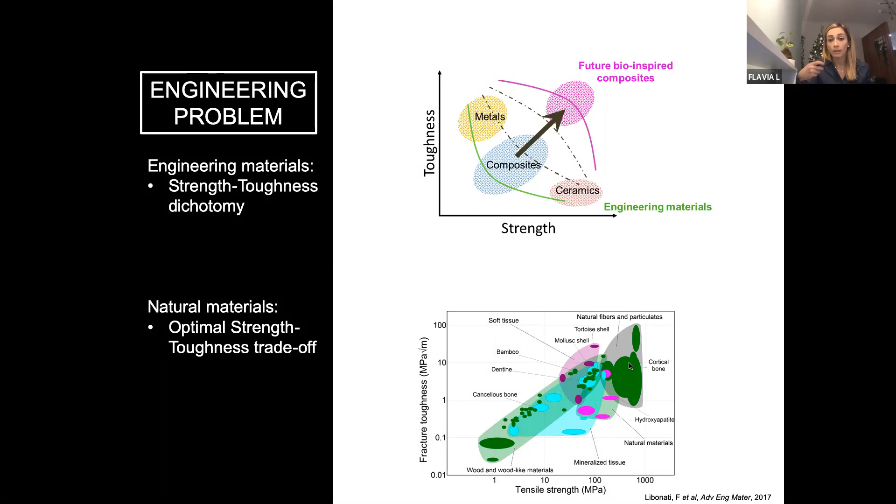And if we look for biomimetic models, probably the best ones are nacre and bone. In my research, since my postdoc and afterwards when I became assistant professor, now at the University of Genoa as associate professor, together with my colleagues, what we are trying to do is design materials inspired by nature, and in particular inspired by bone.

Bone has been my main source of inspiration because it is a lightweight, strong, and tough material. I don't know how familiar you are with bone, but it is an amazing structure—a multi-scale structure with up to 7 levels of hierarchy.

Here's a simplified version. We are used to the typical dog bone shape at macro to mesoscale, where we can recognize the stiff tissue and the soft tissue—the stiff or compact tissue, also known as cortical bone, and the soft one, also known as trabecular bone, which is a porous tissue.

But if we take a microscope and look at this structure more in detail, especially in the compact tissue, we can find an organized structure called osteon structure. This structure is made by a particular feature called osteon—a circular repeating feature embedded into a matrix.

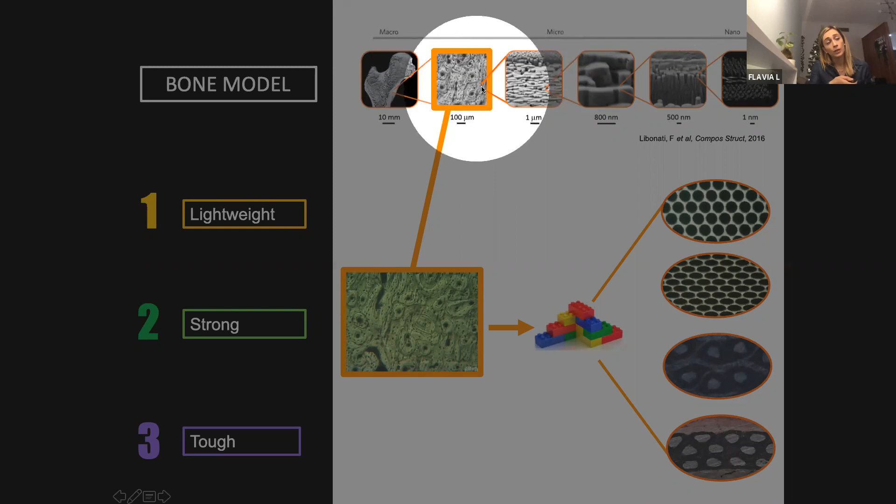And if we go down one level, within each osteon and in between the osteons, we can find different lamellae—circumferential or interstitial lamellae, which are different layers, similar to a fiber-reinforced composite where you find different fibers.

Again, these fibers have different orientation, but also a hierarchical organization, where in the end we can distinguish the main building blocks, which are collagen and hydroxyapatite. Hydroxyapatite is a mineral crystal, usually brittle, although here it's not properly brittle thanks to additional mechanisms occurring at the nanoscale, while collagen protein confers the ability to dissipate energy under mechanical deformation.

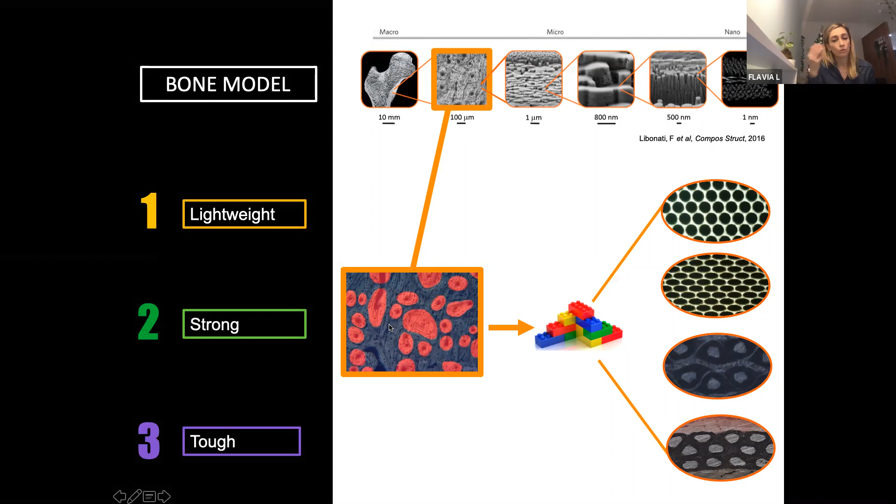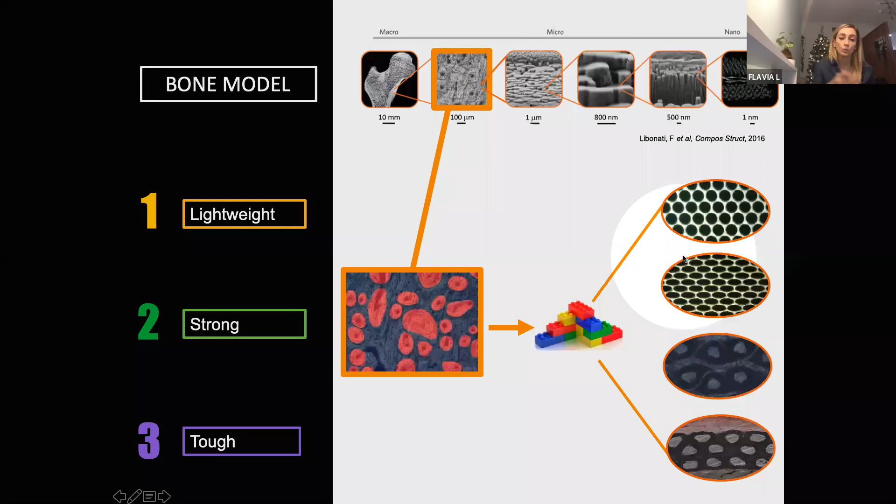In most of the research, we focus on the microscale structure, and we simplify it by considering two main building blocks—different circular or elliptical features embedded into a matrix. Today I'm going to focus on the simplified version that we try to mimic and implement by 3D printing, and then by computational modeling as well.

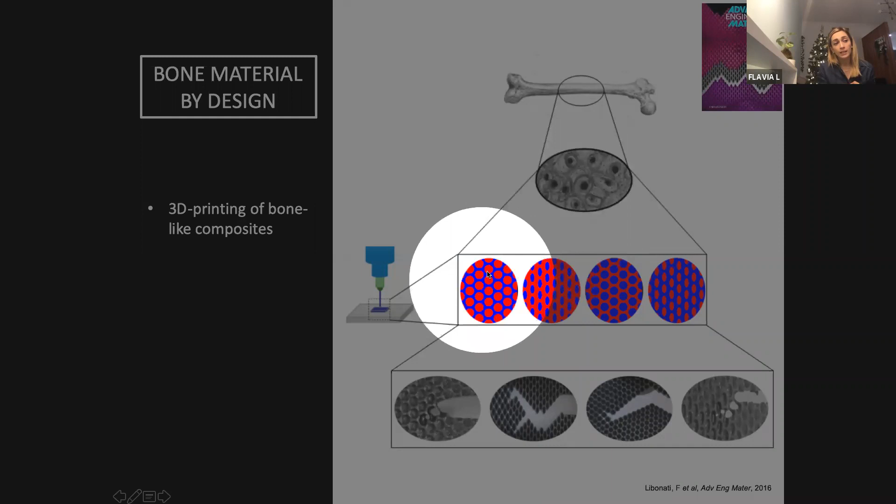So basically, in these previous studies, together with colleagues at MIT and at Politecnico, we used 3D printing as proof of concept to prove the validity of this bone-inspired design in order to achieve damage tolerance. So we considered this structure of cortical bone, and we simplified it into this two material structure, let's say.

We consider the pure material of the 3D printer as building blocks. We keep the osteon volume fraction constant, and we combine them together to achieve different structures, simplifying the osteon as perfectly circular or elliptical. This simple representation neglects many aspects such as hierarchy or interface, but with it we were actually able to mimic the main toughening mechanism observed in real bone, achieving an amplification in toughness of about one order of magnitude.

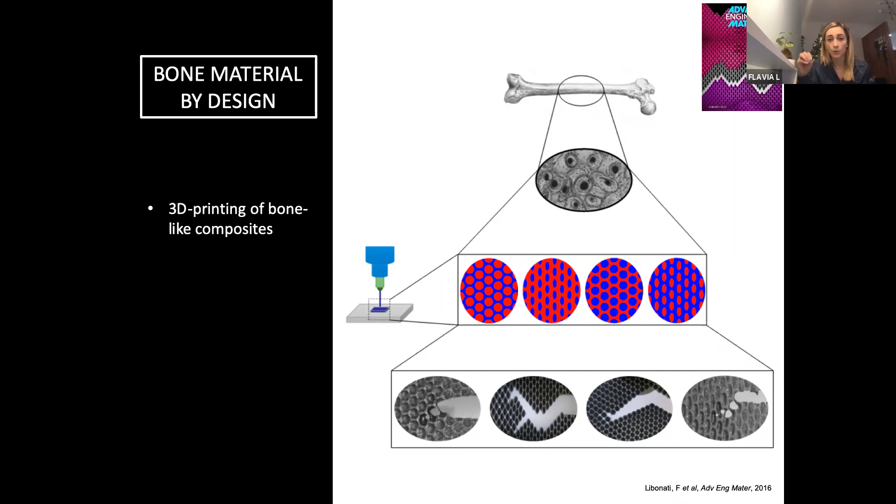But then we realized that with the 3D printer, we can leverage its versatility to design and test all the geometries we want. But we also wanted a numerical framework, usually used in the design phase, to apply a biomimetic but also materials-by-design approach in order to reach our target properties.

So we decided to work on two different fields, both finite element models and lattice spring models. Today I'm going to focus more on the lattice spring model, as it's the main topic of this workshop. But just to give you an idea, both techniques are good, but each one has pros and cons.

Finite element models generally require pre-processed mesh generation and mesh refinement in the area of interest, whereas lattice spring models give the advantage that they do not require mesh regeneration or mesh refinement.

They also provide insights into the material behavior, which was our main goal at the beginning, because we wanted to better see the toughening mechanisms that occur in these materials, since most of the time the behavior of these materials is really structure-driven, so topology-driven.

Of course, we know that this kind of simulation is more time demanding with respect to finite element, but we still try to use both approaches depending on what we are looking at.

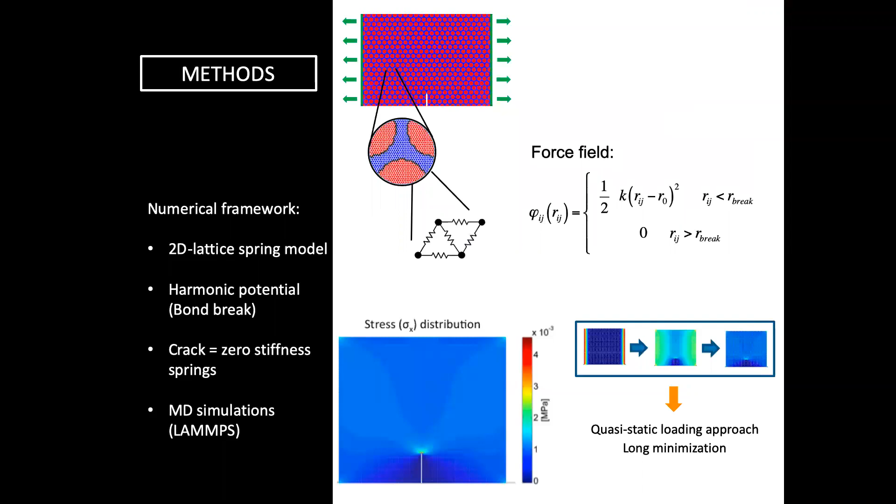So as a first attempt, in our first framework, we use a 2D lattice spring model where we consider a harmonic bond potential to simulate the force field. So the method is...

A question. I think you mentioned disadvantages of the finite element method, but what are the advantages?

Probably I skipped it. Usually they are cost effective, they are reliable because they also provide exact information. So if you want to have an idea of the exact properties, probably finite elements are more accurate in this sense.

But then, they do not provide information about the toughening mechanism. So that's why we try to work on both, considering the computational time of both techniques and also the pros and cons of each one.

What I didn't mention is that besides finite element, we also use the extended finite element method, which allows us to see at least the crack propagation mechanism.

And it's not that it doesn't need mesh refinement. It claims to be a mesh-independent mechanism, although it's not properly mesh independent. So you need to be careful when you use this approach.

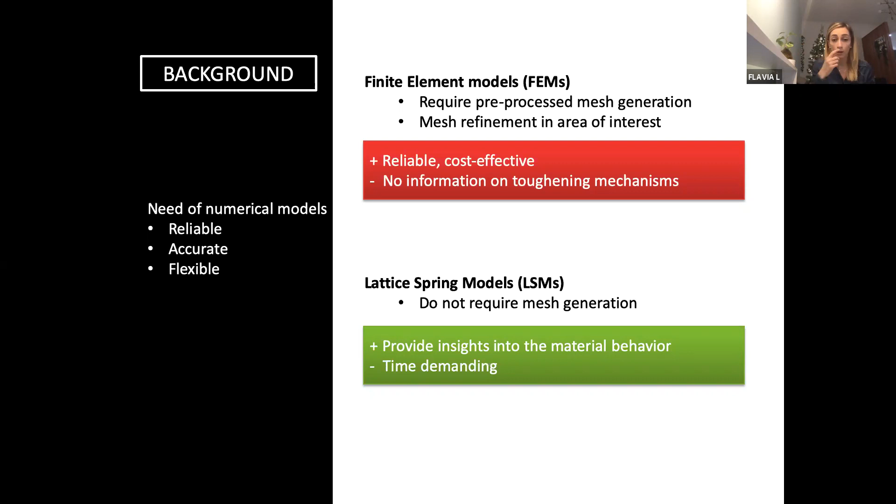But I think each one has its own pros and cons. If we want a comprehensive view of materials design, probably you should use both. Thank you. You're welcome.

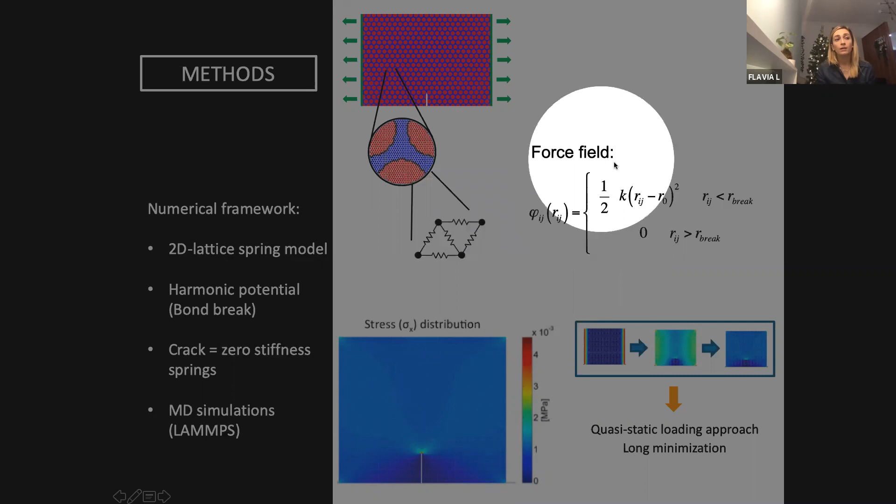Coming back to this lattice spring model, we implemented a 2D lattice spring model where we modeled the crack as a zero stiffness spring, and then we modeled the interaction of the beads through springs with a force field described by a harmonic potential.

Basically, it's a simplified representation where we have only the elastic part, so we don't have plasticity in this model, but it's something that could be implemented afterwards.

All the simulations are run using LAMMPS, a molecular dynamics simulation code, and we use a quasi-static loading approach, which means we consider the two edges and systematically apply strain at the ends, followed by long minimization, which allows us to have a good homogeneous redistribution of stresses without affecting the edges, without stress concentration at the clamps, at the lateral edges.

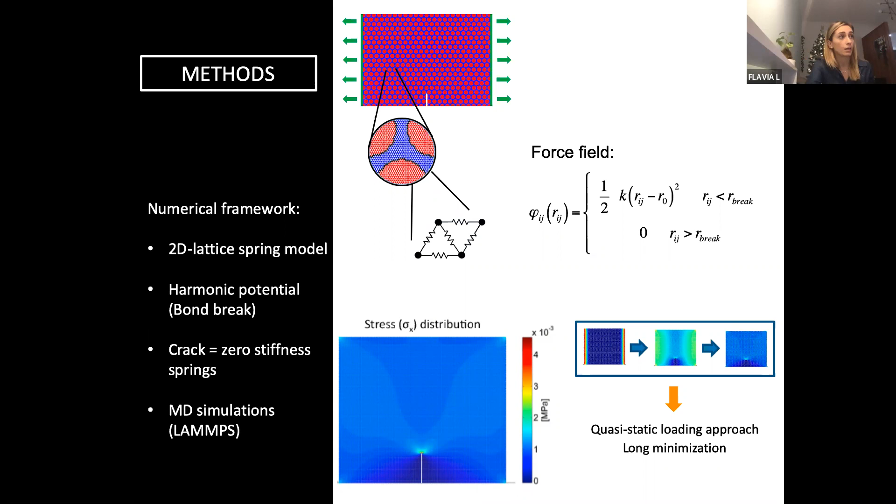First we did a calibration based on the experimental properties, and in particular on the building blocks. So we have stiff base materials and soft base materials.

But what's important is that we also have an interface, which plays a crucial role here. We noticed that by modeling the interface, the behavior changes completely. So in the calibration model, we tried different combinations of reinforcement and matrix to find the best interface values, which could approximate the experimental curve.

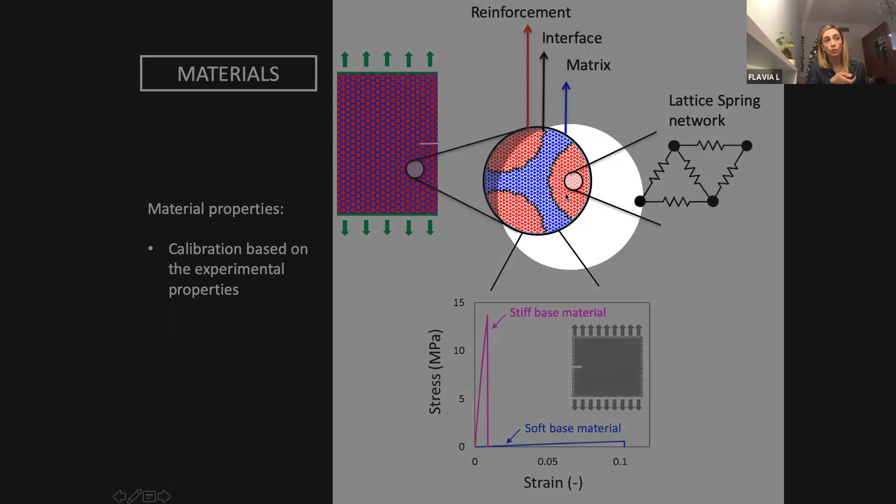Why did we have to do this calibration in a systematic way? Well, because once you print this material - and this is very important for the printing technology - you actually have two materials at the beginning. We use polyjet technology with a Stratasys printer, and basically you have a nozzle with different nozzles.

When you have the jet of these materials in more or less a liquid form, the material is then UV cured immediately. So what happens is that during the curing, these materials have a really low viscosity, which means you can have a mixture of them.

So a third material is formed at the interface. And this is proved also by the fact that in the end, we never get a failure at the interface. The materials in the end are perfectly bonded due to the formation of a chemical reaction, a chemical bond, and the formation of another material.

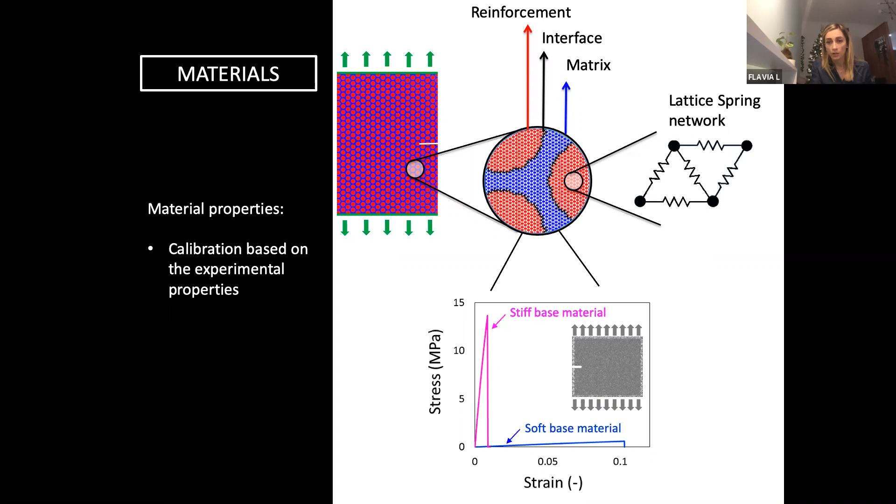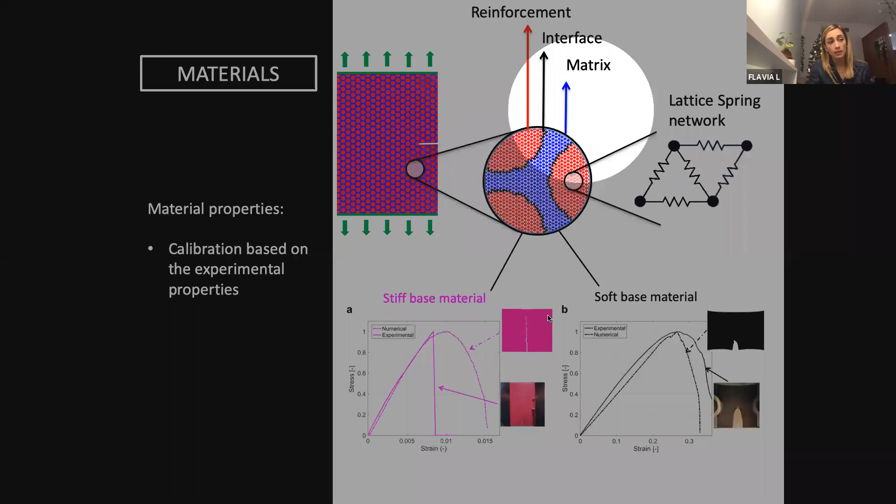So we first did a calibration on these basic materials, and we can also see a comparison between the experimental and numerical curve. Then we implemented all the designs that we previously 3D printed.

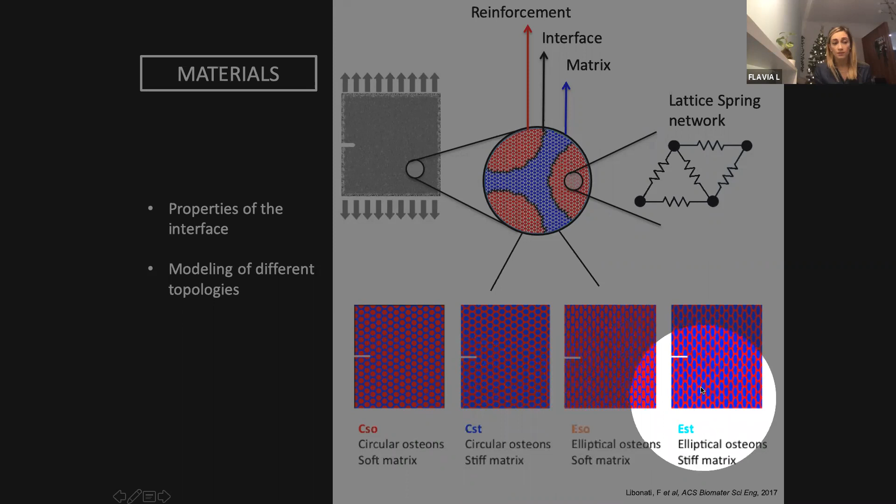We basically have a circular osteon into soft matrix, then the reverse case, into stiff matrix, and then the elliptical one into soft and stiff matrix. Of course, the elliptical one is very anisotropic, so it was studied in both directions. So basically, all the materials that we also 3D printed.

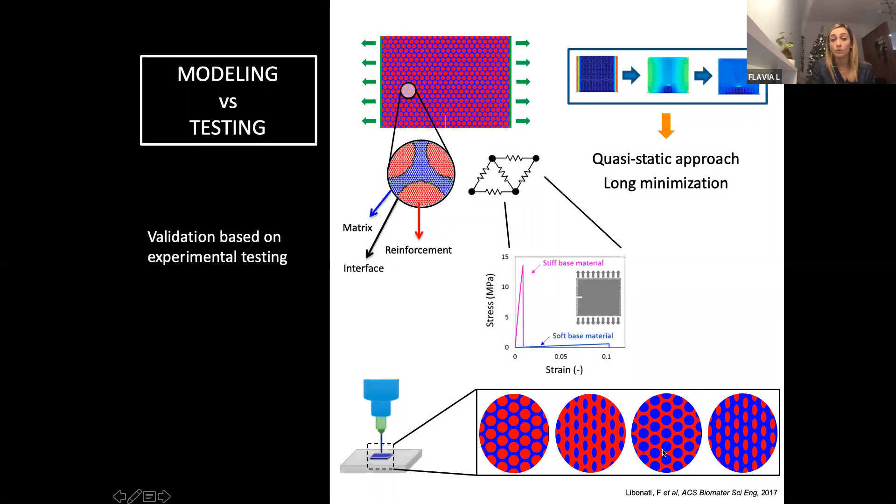So we could, in the end, do a validation of these models. What's interesting is that with this kind of approach, as I said before, with finite element, you can't really predict the exact properties, but this was not our goal in this case.

Our goal was to understand the role of the toughening mechanism on the overall behavior and try to predict which was the best topology. And in this case, we can have a great comparison in terms of experiment and simulation.

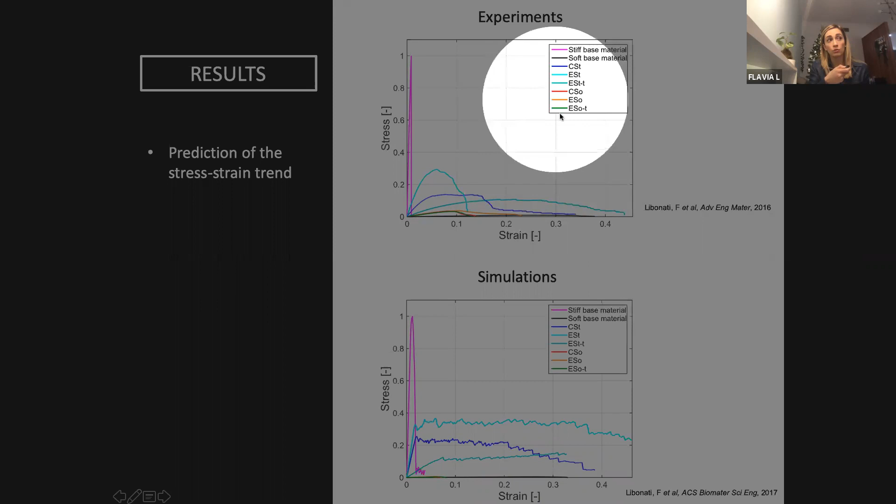You can see how we can get the stress strain curve for homogeneous material, but also for all the topologies. And if we do a one-to-one comparison, we can see how we can mimic the stress strain curve. But what's really interesting is that we can

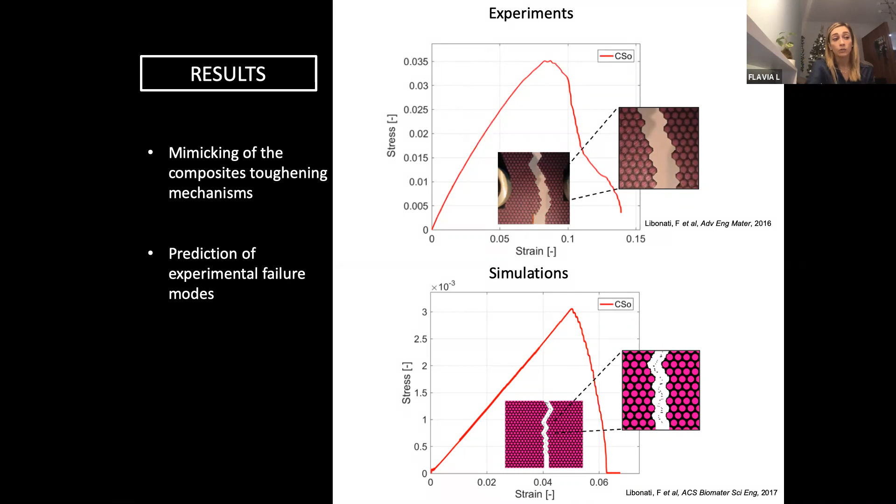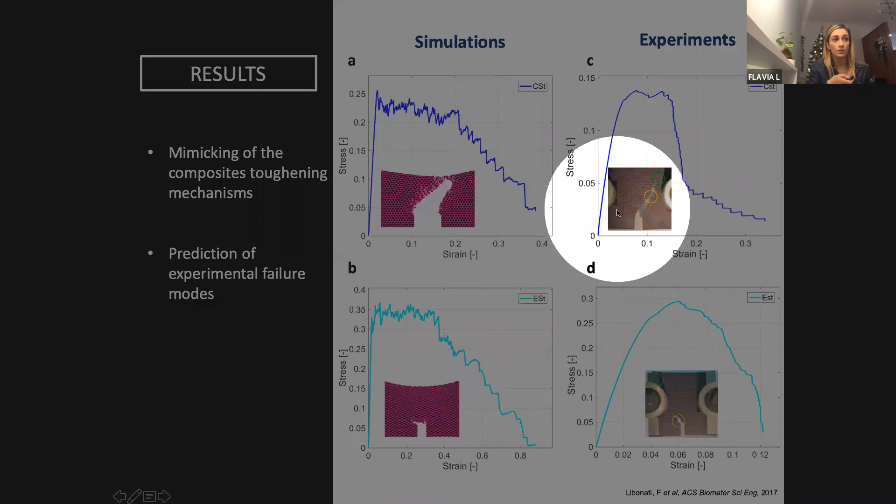really get an insight into the material behavior and see how the crack propagates into each topology. So this was in a circular osteon with soft matrix, but the same you can see if you look at the case of the stiff matrix.

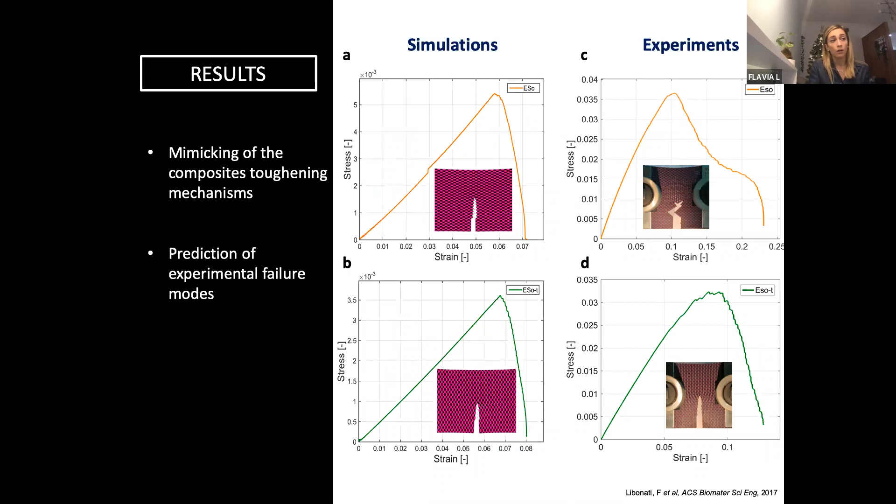And you see all this mechanism, or the case of the elliptical osteon, or again the effect of the anisotropy. You can see here the same material tested in two different directions and how the crack propagates in different ways.

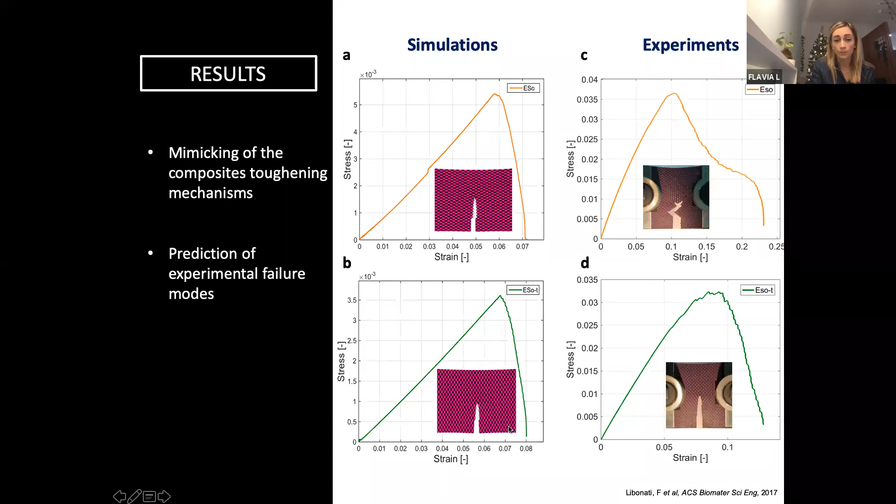Summarizing here, what you can see is that with this kind of method, we can actually mimic all the bone and bioinspired composite toughening mechanisms. So what we can see here is a comparison between the toughening mechanism that we observe in real bone, the schematization and picture of real bone, but also a picture taken on our experimental 3D printed specimen, and then the virtual in silico testing. You can see that in the end, we were able to mimic all these toughening mechanisms.

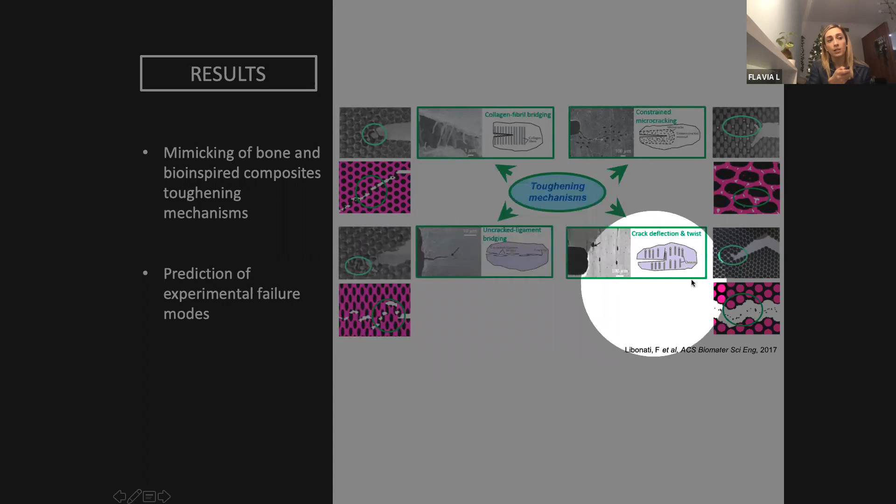The collagen fibril bridging is mimicked through a soft polymer fiber bridging. The constrained microcracking is the formation of tiny cracks in front of the crack tip. Then the uncracked ligament bridging, again the formation of tiny cracks in front of the crack tip. And then the crack deflection and twisting, which is probably the mechanism that mostly contributes to the dissipation of energy and to the toughness enhancement.

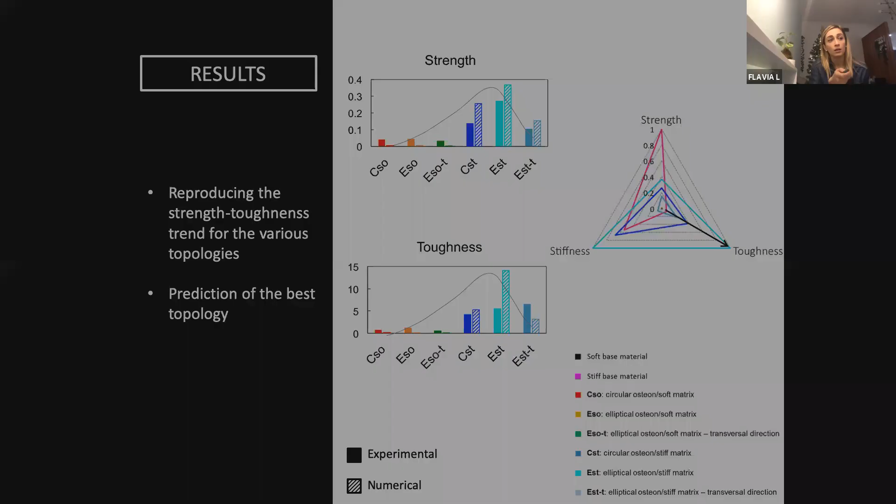So in the end, with this kind of mechanism, what we can do is reproduce at least the strength-toughness trend, which was our goal, and also we are able to predict the topology which provides the best trade-off in terms of strength, toughness, stiffness, all the properties we are interested in.

And also to better understand the effect of the different components. Usually here we provide a simplified schematization, so we decided to have contrasting properties, because we were limited by the materials of the 3D printer. But once you validate the model, you can play with different stiffness ratios and different optimization techniques, and expand the design field as much as you want.

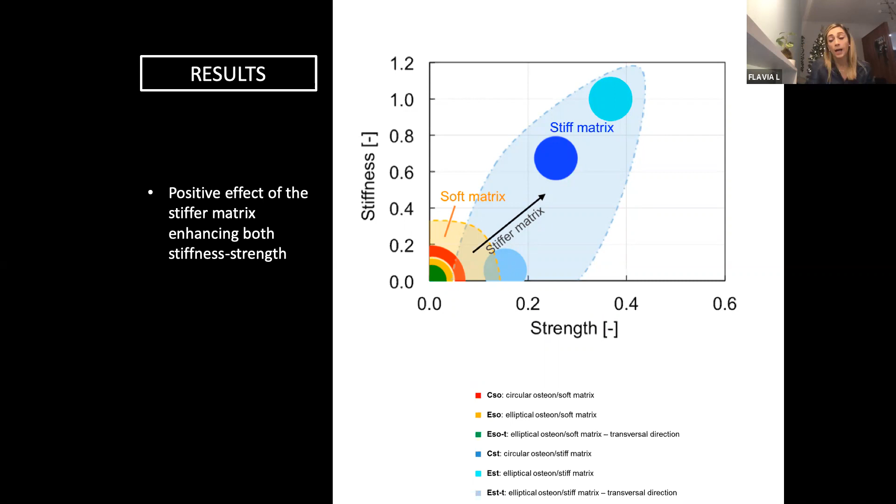Here, what we notice is the positive effect of a stiffer matrix, which really boosts the stiffness-strength combination with respect to a softer matrix. The reason can be provided by looking at the stress distribution. This is again another powerful thing about using simulation.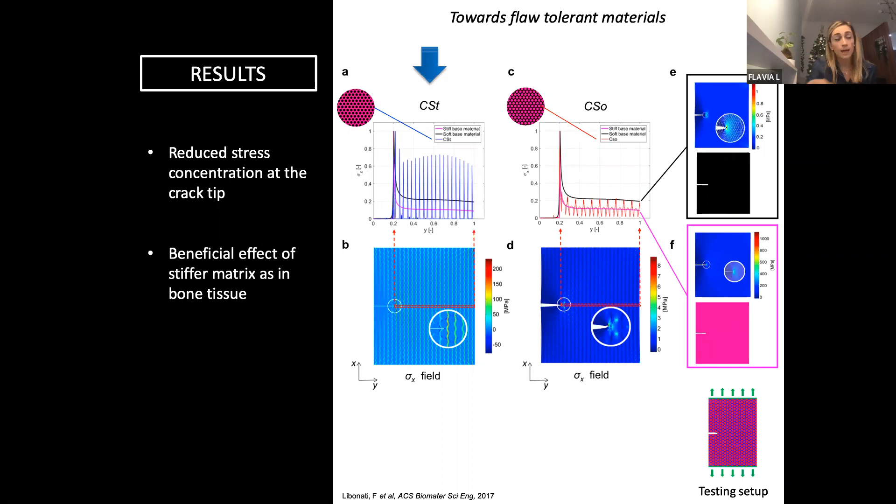But the difference is that with stiff and soft matrices, in both cases you have this heterogeneous stress field, but once you have a stiffer matrix, you have a reduced stress concentration. This means we can move toward flaw-tolerant material in this case, and this is better achieved if we focus on a random distribution of circular and elliptical voids instead.

So after validating this numerical tool, what we did was try to expand the design field and change the topology. This was just an initial attempt which could be further expanded by optimization studies. We combined both circular and elliptical voids and considered random distributions with random orientation, keeping the center of each one constant through our triangular lattice, and keeping also the void volume fraction constant in order to compare with the previous study.

And here we notice how this material is actually reaching flaw tolerance, in the sense that if we look at the stress field from the crack tip to the far field, we can notice that the peak stress is reached not only at the crack tip, but also far from the crack tip. So in this case, we are aiming for flaw-tolerant materials, where the material doesn't feel the main crack anymore, but you can have different positions of energy dissipation, which all contribute to a toughness enhancement in the overall material.

Time by time you dissipate the energy, which means you don't get an immediate breakage, a brittle failure like you get in homogeneous material. So in the sense, you try to distribute cracks. What happens is that the material doesn't fail by the main crack propagation. The crack starts propagating, but then the material starts failing somewhere else.

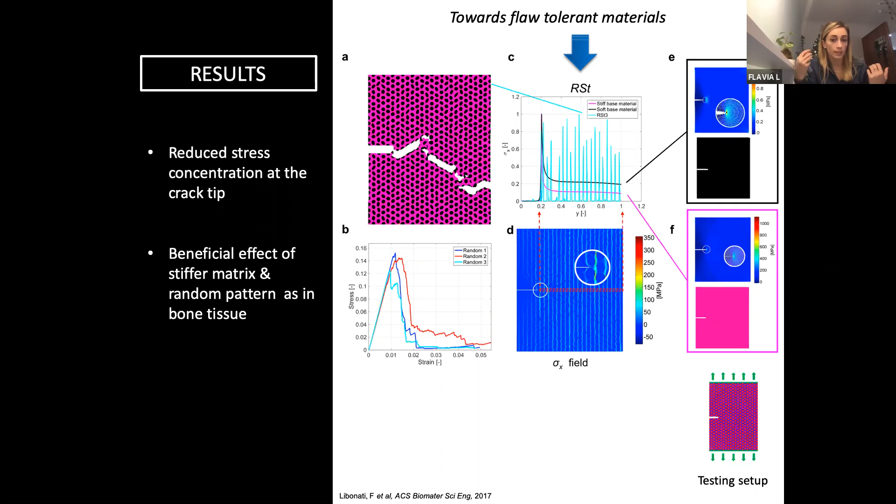So you don't have the main big crack, which is energetically favored in terms of dissipating energy. This is important when you don't want this immediate brittle failure, which is something we want to avoid, at least in the structural field. Thank you. You're welcome.

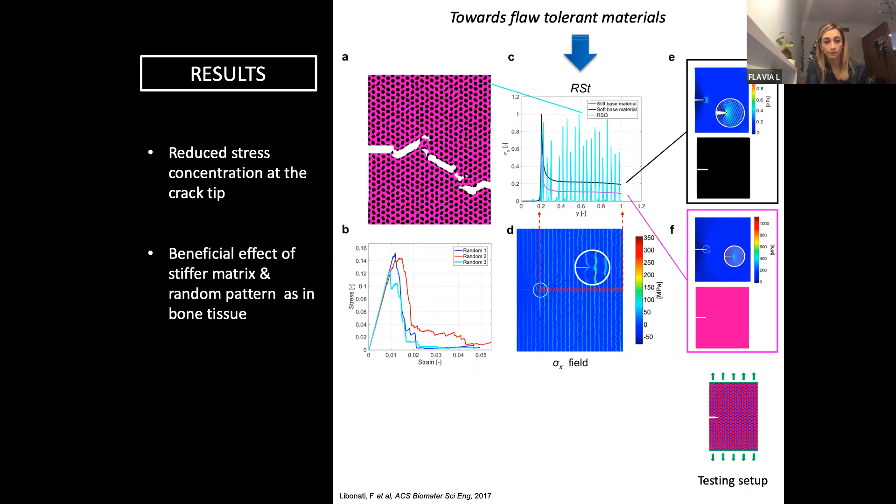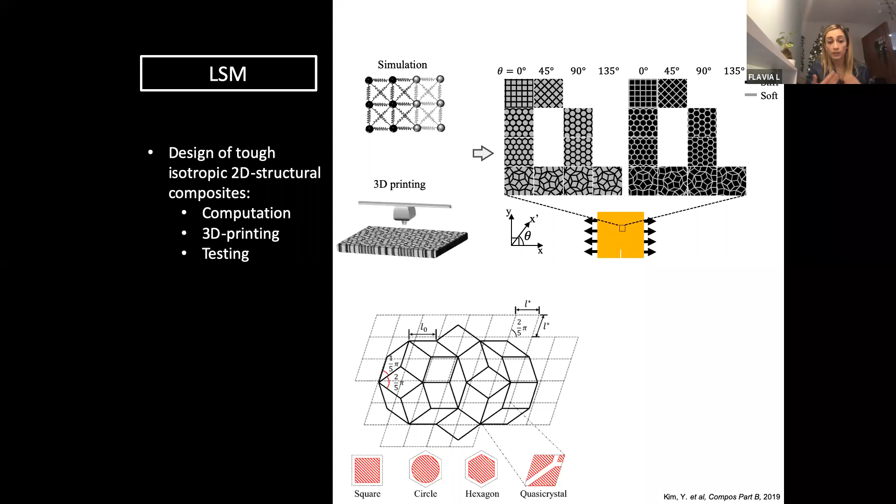Last year we also tried to expand the field together with my collaborator, with the group of Professor Ryu at KAIST. A student of this group was also expanding this study. Based on this simulation, we decided to explore different lattices in order to design tough isotropic 2D structure composites. Again, we used computation, 3D printing, and testing.

In this case we explored different topologies, so square, circle, hexagonal, and quasi-crystal. The difference is that whereas before in the previous study we only focused on this kind of lattice, in the second study we decided to discretize the matter based on two Bravais lattices, the triangular one and the square one, in order to better analyze the effect of loading direction.

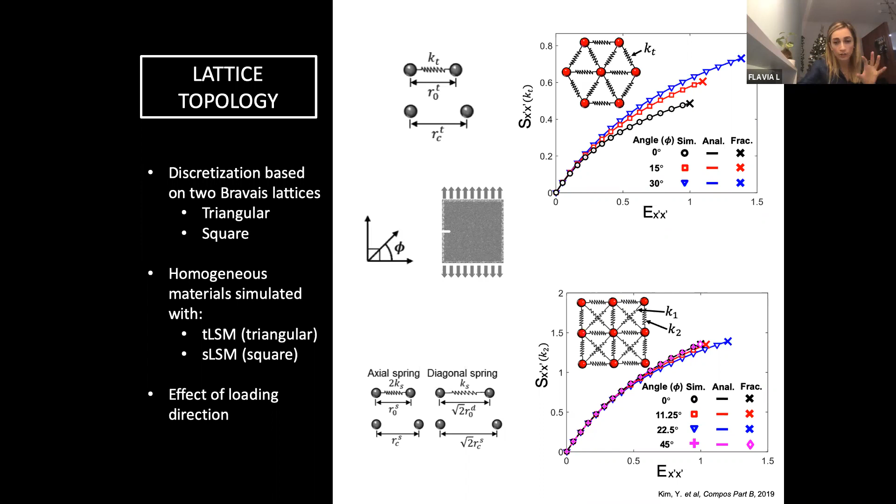I'm not going too much in detail on this one. There is an additional paper if you want to take a look, and I can also provide you information. It's on Composites Part B, published last year.

What is interesting is that you can actually notice a difference with different lattices implemented. If you look at all the images on the top, here we used a triangular lattice spring model, and on the bottom we used a square lattice spring model with two different spring constants for the diagonal one and the horizontal or vertical one.

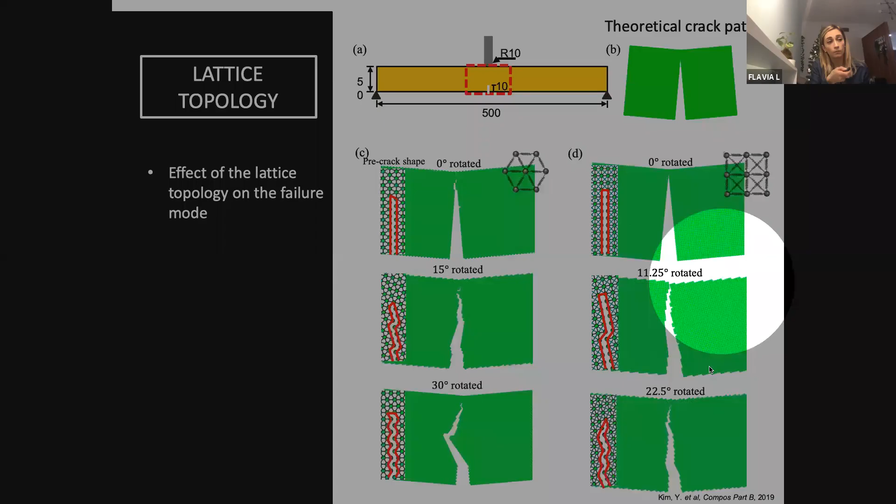You can see we have a different failure mode with respect to theoretical prediction, especially if we consider not only the two different lattices but also the orientation of the lattices. Here is 0 degree rotated, here is 15 degree rotated, and then 30 degrees rotated. So basically there is also this effect that we have to take into account.

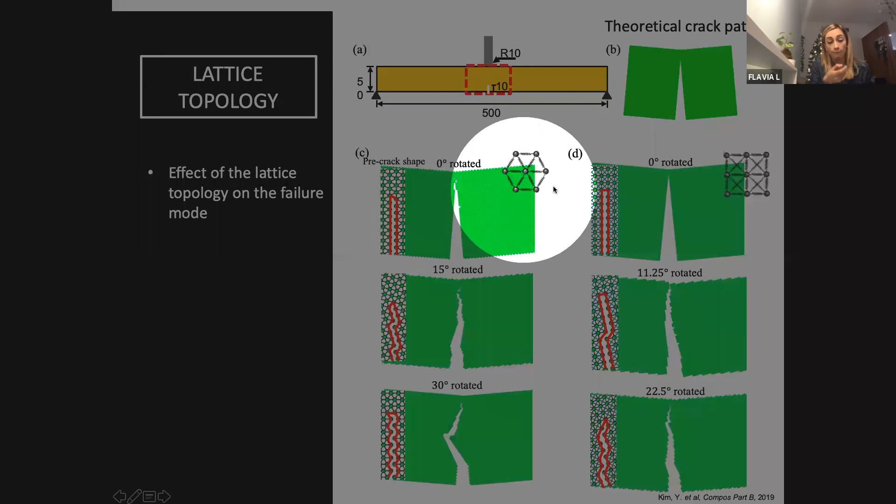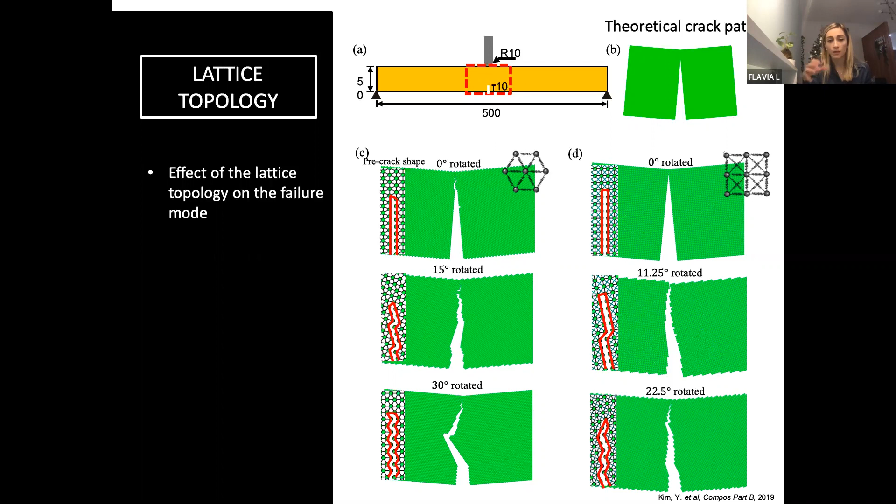This one is more affected by different orientation. In our previous work it worked better, but we need to be careful and take into account the presence of different lattices when modeling these kinds of materials. That would be useful, especially when working with material which has, I don't know, nanoparticles inside, or aligned nanoparticles, or some specific intrinsic anisotropy.

So coming to a conclusion, trying to be on time: what we noticed is that this kind of lattice spring model does not really provide an accurate prediction of the exact stress-strain values, although that was not our target, as I said before. But they are able to reproduce accurately the trend of various topologies, and they are a powerful method in terms of mimicking the bio-inspired composite toughening mechanism, and they also provide accurate prediction of the experimentally observed failure mode.

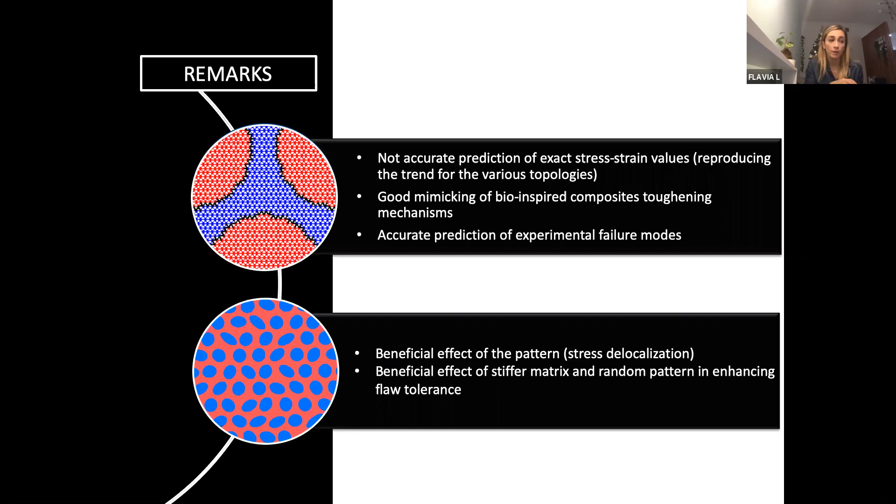Also, what we observed was a beneficial effect of the pattern, in terms of stress delocalization, and a beneficial effect of a stiffer matrix and random patterns in enhancing flaw tolerance.

So in future, as perspective, what we want to do is better study through optimization and also machine learning random structures, in order to reach specific optimized properties, and also use a mixture of materials, not only pure materials, to reduce this stiffness ratio we had at the beginning, and find the optimal stiffness ratio.

This is on the numerical aspect. Also, what is interesting is to systematically study the effect of the interface layer, which plays a crucial role, especially in the case of bone, where we actually have this tiny border called the cement line. Again, from both a numerical and experimental point of view, studying random structures and maybe using finite element models to predict the exact properties, trying to couple different techniques.

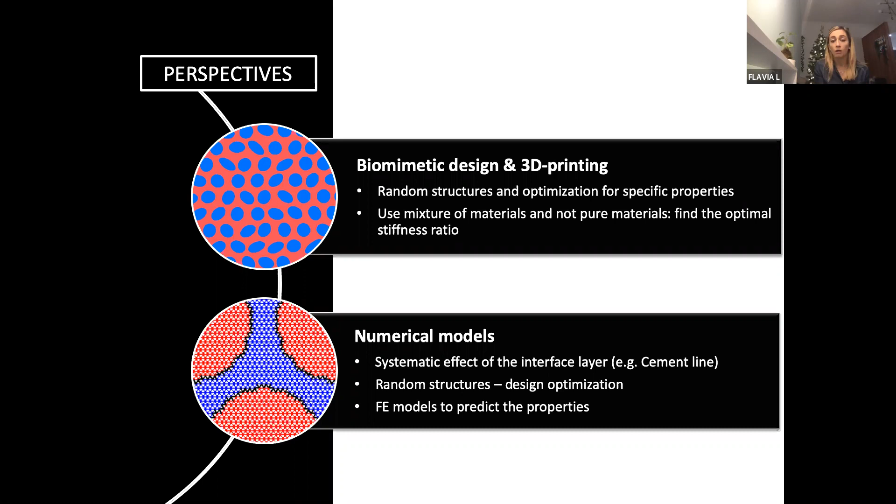So with this, I have concluded. Thank you for your attention.